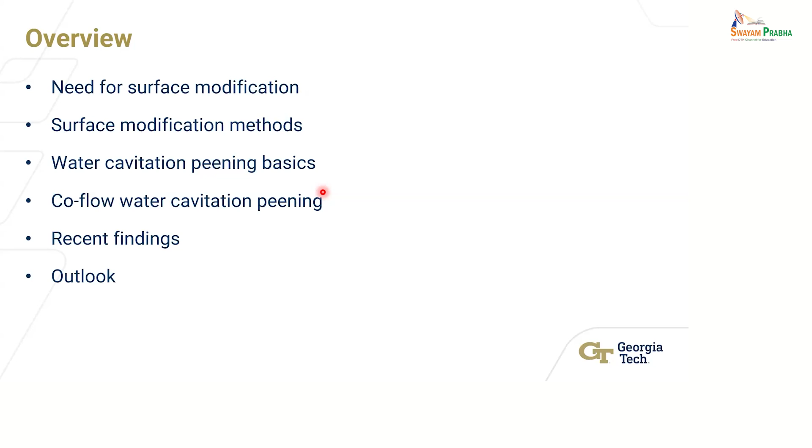You don't want any relative motion, but it can happen, so there's a failure - these blades can fail. That's a catastrophic failure, by the way. If you're flying a plane and that happens, that's a bad thing. It should never happen - rarely it happens, but it does occasionally. That's a turbine blade example where it failed because the properties it was designed and manufactured for were either inadequate, or the environment or operating conditions exceeded what you designed and produced it for.

Fatigue failure is common. Any kind of surface subjected to cyclic loading - whether mechanical, thermal, or some other type of cyclic loading - eventually fails. It's designed to withstand a certain number of cycles before it fails. Hopefully that number of cycles is well beyond the life of that component - that's how you want to design them.

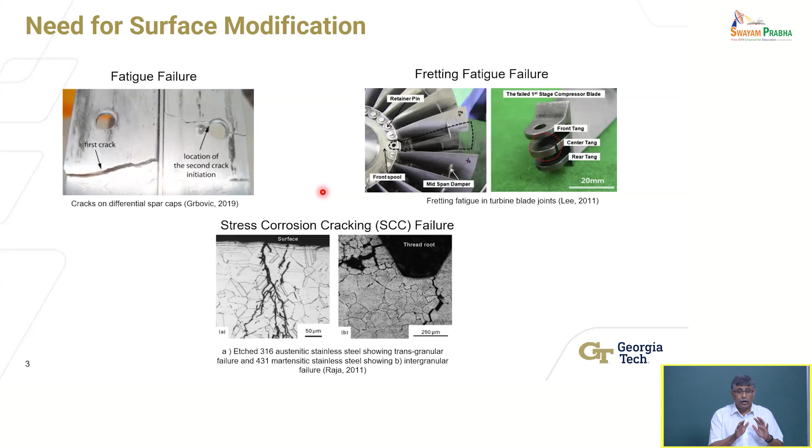So these are the reasons why we need to somehow modify the surface to avoid these types of failures. That's the motivation for surface modification.

Now, there are many ways to modify surfaces. Professor Samuel did a great job telling you about many different manufacturing processes. You produce the component, but usually these types of products that require surface engineering need more than just the manufacturing process - you produce it, then may have to subject it to some other steps, such as the surface modification process I'm going to talk about.

So there are many types of surface engineering processes. Typically, the goal is to achieve a certain type of surface quality, both in terms of topography, geometry, microgeometry, as well as near-surface properties - mechanical properties, tribological properties such as friction, wear, lubrication, whatever phenomenon is relevant to that application - and subsurface mechanical properties. Some fatigue failures happen because a crack initiates just below the surface and propagates, or a ball bearing fails and spallation occurs, things of that nature.

So there are many ways to actually modify surfaces. There are ways to do surface engineering where you don't alter the chemistry - and this is what we will focus on, where we're trying not to alter the chemistry. But there are also processes where you will alter the chemistry, and sometimes that's desirable.

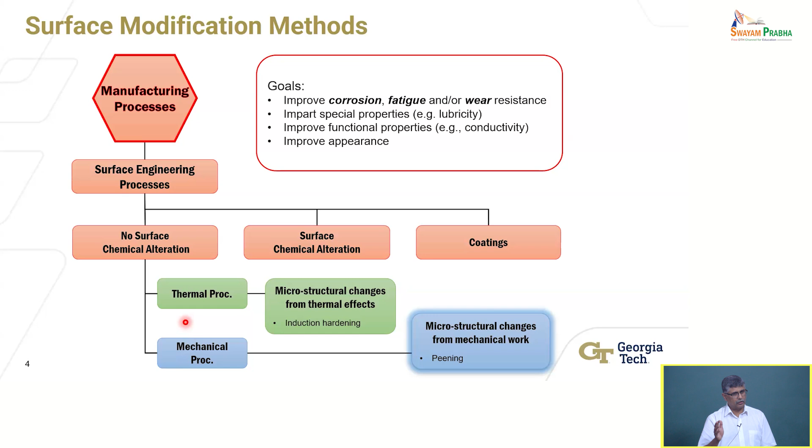The simplest way to think of peening - there are many types of peening technologies, but the simplest example is shot blasting. How many of you understand what I mean by shot blasting? You basically subject a surface to mechanical shots, which could be pellets - steel pellets, ceramic pellets, whatever the case may be - hard material impacting the surface and producing localized, permanent deformation.

Yes? How do you basically identify whether the process will be thermal or mechanical? How do you identify whether the process to be carried out will have thermal effects or not?

That depends on many factors. For example, sometimes you can do both, and there may be non-technical reasons for you to pick one or the other. For example, laser shock peening - Professor Samuel mentioned it - you can use lasers to achieve the same end effect, to modify the surface, but it has its advantages and limitations. Sometimes the limitations for your particular application may be such that you can't use it. If you can use it, that's a thermal process for you. Whereas in your case, you may either not have a laser system that can do it, or it might be too expensive - there are non-technical reasons that can drive it. Sometimes there are technical reasons, because that material cannot be subjected to the kind of thermal temperatures that might be generated, as it will damage the material below the surface. So it's a good question - there is not one simple answer to it.

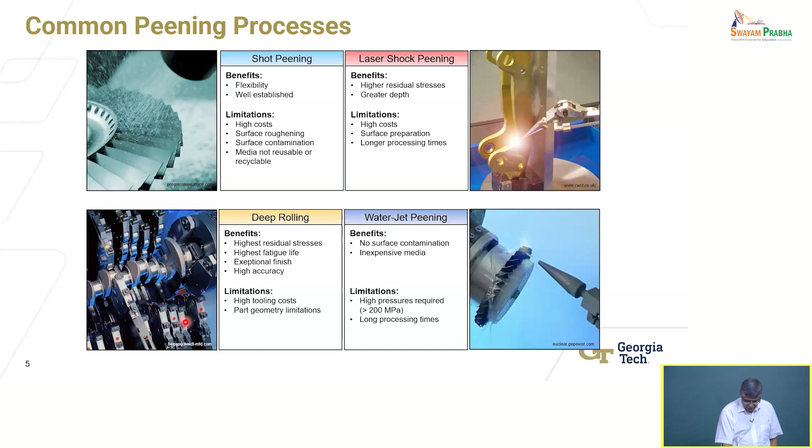So that's the motivation for us to look at an alternate technique called water cavitation peening. So what is water cavitation peening? I won't go through everything on this slide - the point I'm making is to justify why we should even look at this process. Why do we need a new process? There are at least four I've talked about.

They exist because in general it's not just a matter of residual stresses. Residual stresses are key to extending fatigue life, but other factors matter too. Surface finish - fatigue life is determined not just by compressive stresses, it's also affected by surface finish. If you have a rough surface, those roughness peaks can act as stress concentration points and lead to failure. So you need to balance all of these things.

Also, if the surface has been cold worked - how many folks understand cold working? Undergraduates, I want to make sure - I know graduate students understand it. Do you understand cold working, hot working, warm working? You're working the metal, deforming it at different temperatures. Cold working would be under room temperature - plastically working the metal is what we're talking about.

So if the metal's already been cold worked, what have you done to the metal? What does it mean to say I have cold worked the metal? It's been deformed - but what does deformation do to the material? No thermal stress is acting. What I'm trying to ask is, why did they change? What did you do? By deformation, what do you mean? Dimensions change.

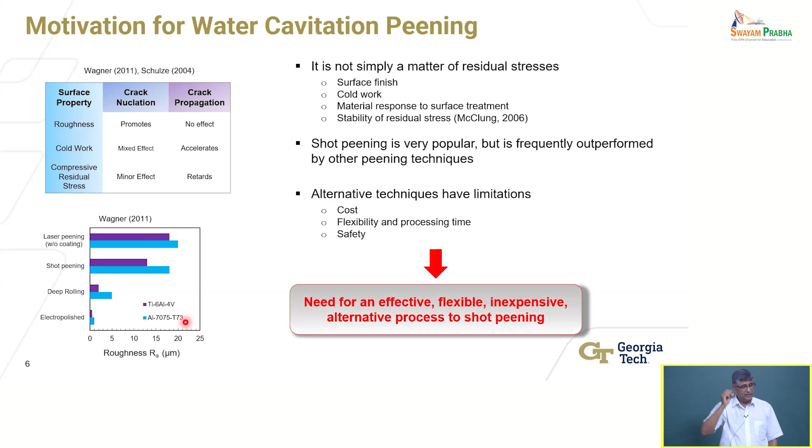So there are reasons to look at alternate methods. But practically speaking, cost, flexibility, processing time, safety - these are all other factors that in practice people want. I mentioned shot peening is used in the aerospace industry, but people throw the shot away to a landfill, and that's not a good thing. That could be a reason to focus on some other process. So we need an effective, flexible, inexpensive alternate process to shot peening. That's what motivated us to look at it - we had a sponsor, an aerospace company, that actually came to us and we worked with them.

Now I'll explain the very high level understanding again, and for those who have a deeper level of understanding, can ask me questions and I'll try to answer. But I'll try to keep it at a level where I don't lose the interest of a lot of the undergraduate students here as well.

So what is the principle of cavitation? How many people here understand what cavitation is, or at least know what it is? Basically cavitation is due to some stresses making a cavity in the surfaces. No, that's not the cavitation I'm talking about.

Cavitation is basically a phenomenon that occurs in fluids - fluids will typically cavitate, although gases can cavitate too. What does cavitation mean? It's the appearance of vapor cavities - think of bubbles, air bubbles forming in a column of water. Say I have water with no air bubbles to begin with, but depending on how I deliver the water, I might generate vapor bubbles. These vapor bubbles form inside an initially homogeneous liquid medium, such as water or any other medium, due to a local reduction of pressure - the pressure in the flow drops and a vapor bubble forms. Think of not just one bubble, but hundreds and thousands of bubbles forming - that's the phenomenon of cavitation.

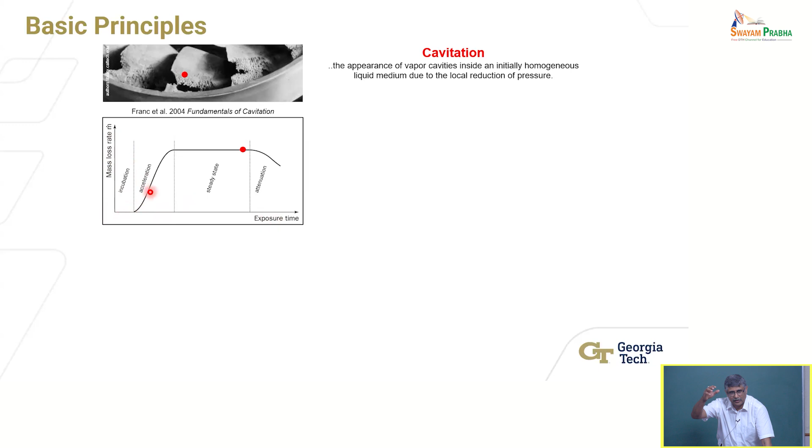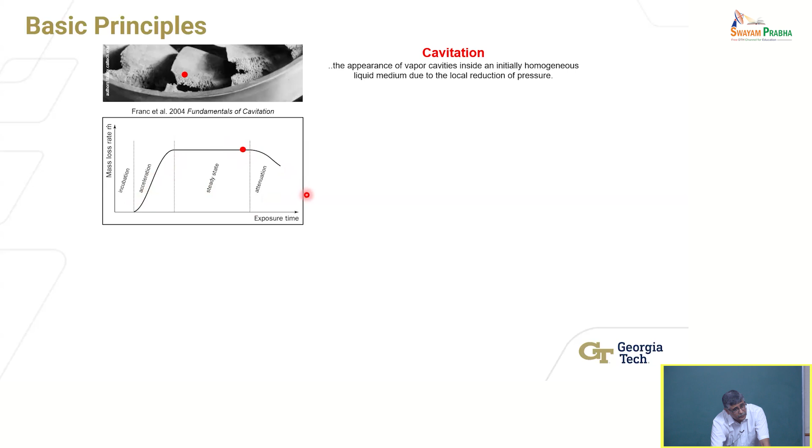Initially, the surface has some incubation time. It takes some finite amount of time for these bubbles to produce enough strain in the material to cause it to deform plastically, and once you strain it past the elastic limit, the fracture strain, it'll fail and start eroding. So it takes some time. There's an acceleration period, then steady state, and eventually it'll attenuate. So how do we take advantage of this?

This is the basic principle. So how do I use it to generate residual stresses? Instead of using mechanical shocks, I want to use these bubbles.

If you look at this plot, mass loss versus time, initially what will happen is the shock waves will deform the surface locally, past the elastic limit, straining it, and once you remove the load, you'll have some residual stress. So residual stresses will rapidly build up.

If you continue to expose the same region to these collapsing bubbles, you try to strain it more and more up to a limit, and eventually you start causing it to fail. That takes longer. So if my goal is to erode and remove material, I'll expose it for a very long time, or some finite time depending on the material. But if I simply want to generate residual stresses, I'll expose it for a much shorter time period, and the stresses will saturate, then I stop. This time is about a 5th to a 20th of the time it takes to erode, so it's a very short amount of time.

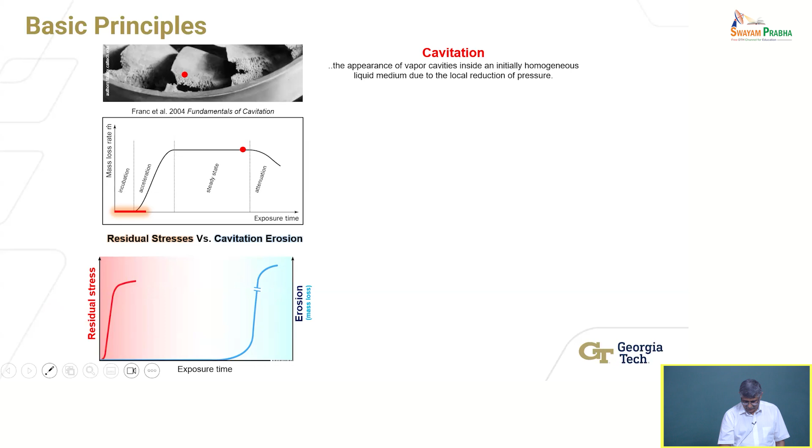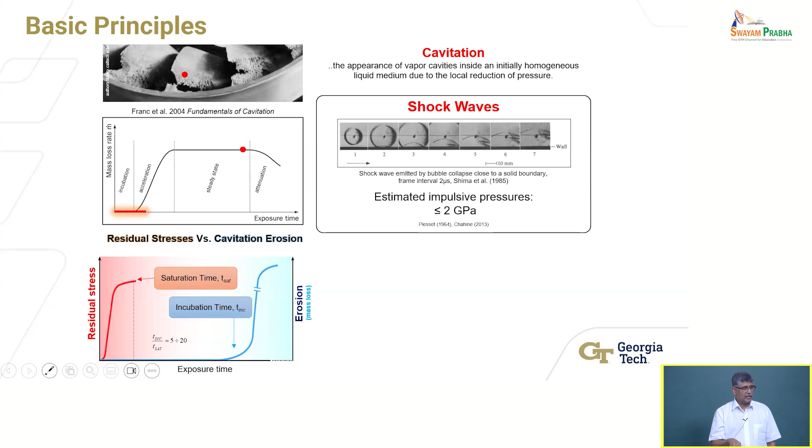As I already said, you can generate very high impulse pressures. Each bubble collapse event can generate on the order of gigapascals in localized pressure, which is sufficient to deform the material. You also generate what are called reentrant jets, micro jets formed as the bubbles collapse. Think of it as water coming in, and between the bubbles there's a very small gap that reduces as the bubble shrinks during collapse. This speeds up the water and produces very high speed jets, on the order of 500 meters per second, extremely high speeds.

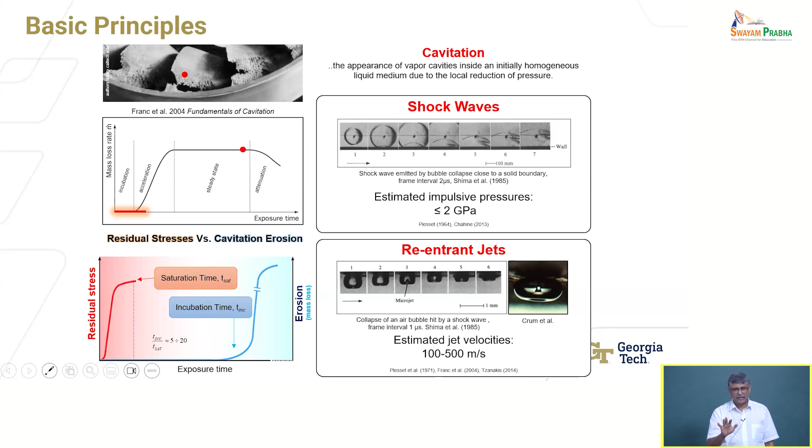The combination of these two things, high impulse pressures and micro jets, can be taken advantage of to generate residual stresses using water. That's the idea behind water cavitation peening, the basic concept. As long as you understand that, nothing else matters, everything else I say is extra stuff, even if you don't follow it, it's fine.

Now, how do you do this in practice?

So this is a process that's actually used. It's part of the standards for treating nuclear reactors in Japan. They use a process like this called water cavitation peening because a nuclear reactor is already in submerged condition, liquid is there. So they can do it with liquid present without having to evacuate and stop the reactor. That's one advantage. But it can be used for aerospace and other applications too. A lot of the work was done in Japan initially.

So what is happening? The easiest way to generate this cavitation phenomenon, you can actually generate even with a pipe. If you have a garden hose and you constrict the water flow to speed up the velocity of fluid high enough, and you shoot it at some dirt, you'll clean it. That may be just water hammer impact, but if you generate enough turbulence, you'll actually produce cavitation there too. So there are very simple ways of generating it if you want to.

The simplest way here for industrial use, obviously you are not going to take a garden hose and try to do that in a manufacturing environment. So the idea would be to take a nozzle, design it with some geometry, and submerge it in some tank of water. So this is a stationary column of water. Here's a nozzle submerged in a tank of water.

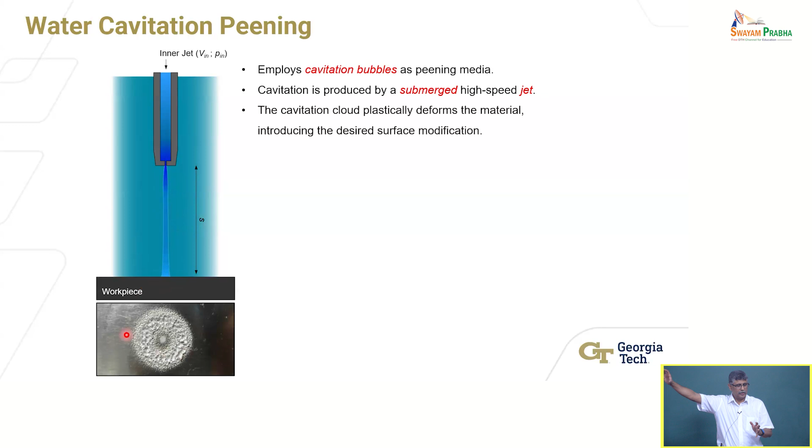Now this jet is moving down, let's say at the surface, and if you can design this process such that this cloud of lots of bubbles - I'll show you some videos - comes and collapses at the surface, and if you expose it for a sufficient period of time (remember we talked about saturation and how long it takes to erode), if you expose it long enough, you will cause erosion like this. You'll have pits forming in the metal. That picture is an example of a jet like this removing material. That's the principle. It's called submerged cavitation jet peening. This is one way to generate it.

The other process we'll talk about is a variation of this. Now the disadvantage of this is that if I want to do this on a large aircraft structure, I need to submerge that structure in a large tank of water. That's not practical - I need to build such a big system to do it. It's expensive, not easy to do. But instead, if I were to take a high-speed jet and put it inside a low-speed jet, like a coaxial tube - two tubes coaxially located, such that you have a low-speed jet and a high-speed jet - I can put this coaxial tube at the end effector of a robot arm or on the end of a machine tool and move it around anywhere. I don't need to submerge anything. That's the other variation we looked at.

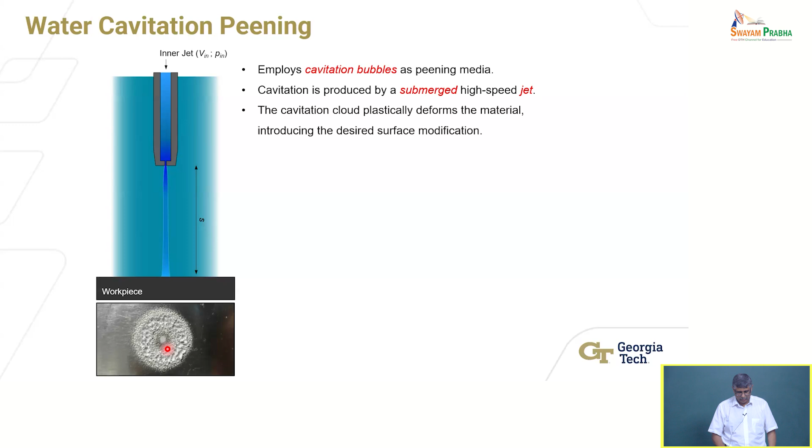So anyway, this is the cloud that I'm talking about. Here's an example from Professor Soyama and his group in Japan, which shows this submerged process generating this cavitating cloud. This is the cloud being generated, and it's collapsing in this region, causing this peening effect or erosion. If you expose it for too long, it'll erode. If you expose it for a shorter period of time, just enough to saturate the stresses in the material, you'll produce residual stresses - same idea as shot peening. Sometimes people call this shot-less peening, since there's no mechanical shot. But anyway, the same idea.

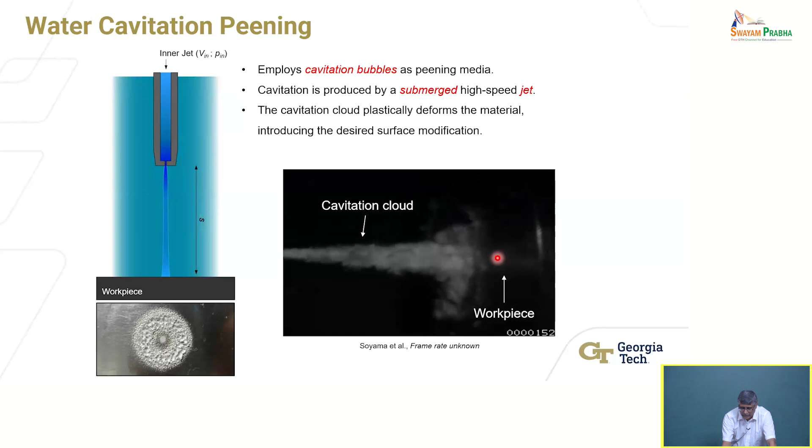Is cavitation present normally in the fluid, or are we creating it? You're creating it by injecting a high-speed jet into a stationary column of water. So like you said, propellers due to cavitation. Correct. Correct. So does it mean that the cavitation is present in the water? It's not.

It's created by the rotating turbine that's generating turbulence. That's what's happening. If the ship is stationary and the engine is not running, it won't cavitate. It might corrode, but that's different.

Sir, by what do you estimate that the process is done, that the target is achieved? How do you determine that you concentrate that material for this many seconds or minutes? How do you estimate the time? That's not simple. You have to understand enough about the process.

You have to understand the material, and the response of the material to the process. What is the process doing in the first place? How do these bubbles collapse onto the material? How much does it deform, and how long does it take for it to strain? All of these things have to be understood before you can say I need to expose each point on the surface for X number of seconds.

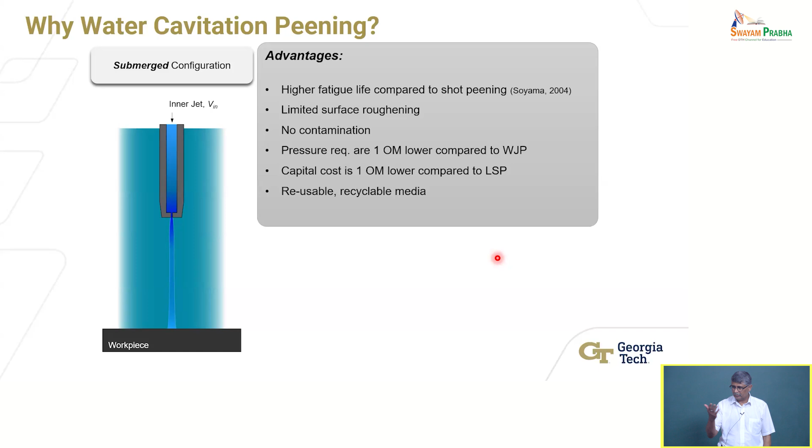The media is reusable and recyclable—water can be recycled, etc. Is this method effective enough for composite materials, or is it restricted to metals? Metallic materials only.

I'll show an example at the end where, for peening, you don't peen composite materials. Composite materials can't be treated this way because they don't behave the same way. They basically have a polymer matrix with some reinforcement material that is inorganic or organic, so they won't behave the same way. You cannot produce the same effects in composite materials, at least not polymer composite materials. Metal matrix composites are a different issue.

Are there any other similar methods that could be used as alternatives for composite materials? Well, for composite materials under fatigue loading, you design the composite material to withstand fatigue loading rather than doing post-processing or surface engineering to achieve that result.

Composite materials are lightweight, they can be strong and lightweight. That's what lightweighting is driving their use, whether it's in aircraft structures, skin of the aircraft, or in high-end electric vehicles and so on, body of the structure. So none of these processes, peening is not something people do for good reason, because these materials don't respond the same way metals do.

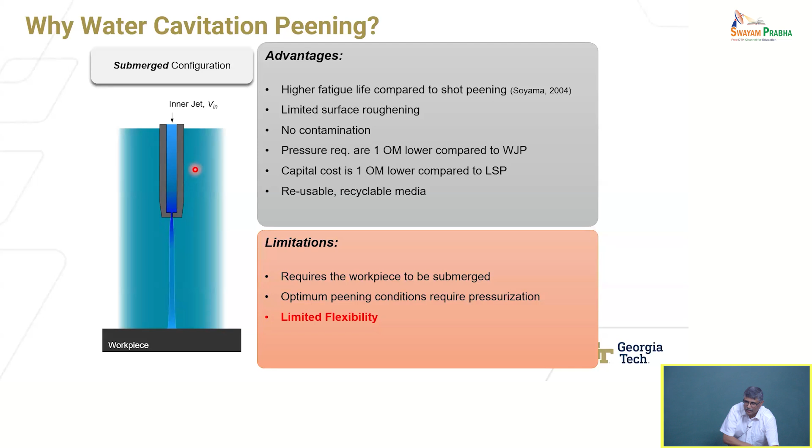It's harder to do. So a co-flow system, which is the same idea, but you have a high-speed jet injecting water into a column, but it's a moving column, not a stationary column of water surrounding the high-speed jet. And that low-speed column of water is generated through this coaxial pipe around it.

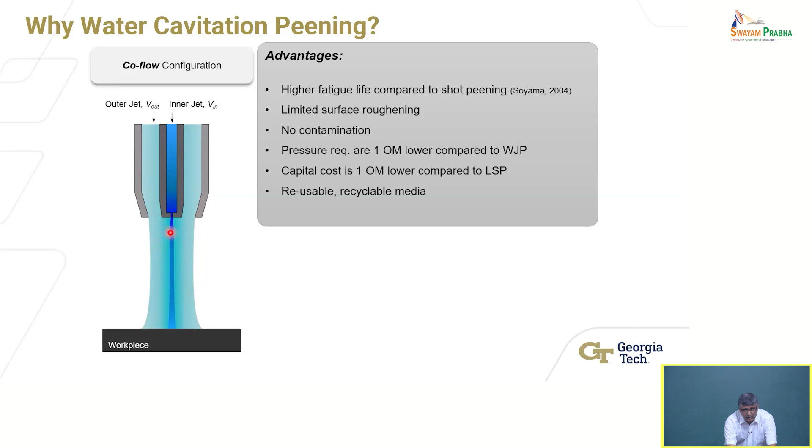So you still have the same principle. This high-speed jet interacts with the low-speed jet, okay, generates shear or turbulence, generates cavitation, and moves this, right? Same idea. The thing is, this process people have not investigated a lot.

So about 10, more than 10, 12 years ago, around 2010 or so, we said, okay, this sounds interesting. This is a practically relevant process. I can put this on the end effector of a robot arm or a gantry and move this around. So from a practical implementation standpoint, it's easier. Or I can do it on a machine tool where already I have an actuation system, right?

XYZ motion is there. You also have coolant in a machine tool, which is an oil-based emulsion, water and oil, right? And I can machine the part, and then I need to peen one region of the part. I can simply change from a cutting tool in a CNC machine to a nozzle and use the fluid to do it. That is our idea.

That's where we started. Industry did not like that idea because they say, well, I buy a machine tool to cut metal, not to peen. So that is their practical reason. But to me, as a researcher and a scientist, hey, that's practical. I can do it on the same platform, both produce the part and peen it, right? So, but anyway, that's where we started.

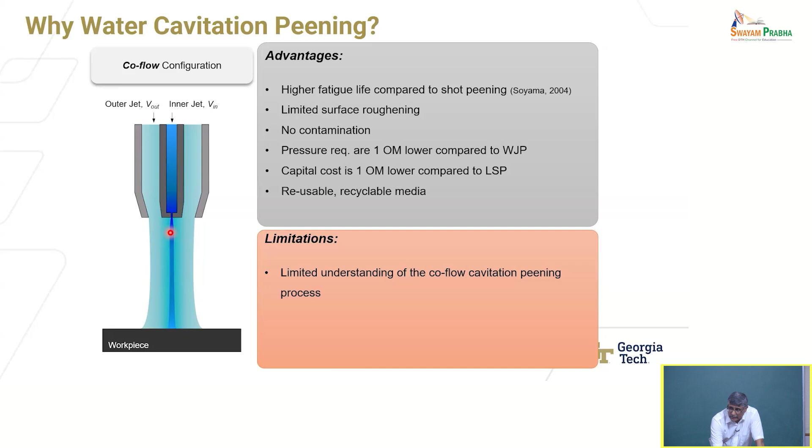So we can do this much more easily, and that is our reason, but the scientific understanding was not as deep available in the literature. The Japanese had done some work. So we started looking at this, and here's a video that shows you the co-flow cavitation phenomenon.

It's a high-speed video of the cloud forming and dissipating. You see that dark region in the center, and you see the low velocity fluid around it, the column. That's the coaxial flow, low speed jet. High speed jet is that center one that injects the water and generates this cavitation cloud.

There are lots and lots of air bubbles. You cannot see how many. We don't know, that's the unknown part. It requires very sophisticated ways of actually trying to see what's inside. Those go beyond even what we can do. I mean, there are people in fluid mechanics who will do some sort of imaging techniques to try and understand it, but it's still a research issue.

But nevertheless, I can generate this. You can see this pulsating cloud formation and dissipation, formation and dissipation. And you see some oscillation as well, right?

And so if I place the part, the surface that I want to peen, at the right distance, where I have the strongest cloud, let's say the largest cloud, which hopefully has most of the bubbles, okay, and make it collapse, then I should be able to alter the surface, right? Modify the surface. That's the idea.

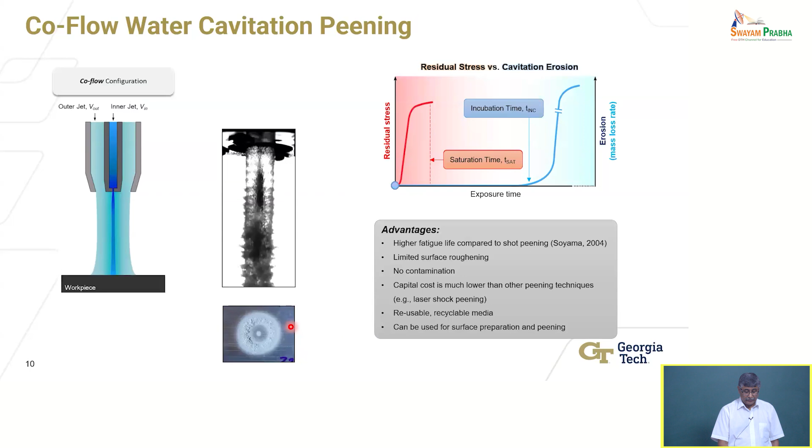You will have to vary the pressure at the pump, basically. Now there are ways of varying the pressure by designing the nozzle as well. So if you have a fixed pump and you want to intensify the cavitation, make it stronger, so I can peen more difficult to deform metals, titanium alloys, some other super alloys, then the bubble collapse events have to generate much stronger impulse pressures. You can do that by designing nozzles.

So this is where the intellectual property lies. The creativity is in how you design the nozzle. That's one way of changing the pressure characteristics. So, yeah, that would be the way.

So when we compare this co-flow configuration, is the advantage only the time variation? No, I think it's the flexibility of the process relative to the submerged case, where I need to have a tank. Here I don't need a tank, so it's more flexible. I can move it around anywhere I want. We even built a handheld system, and robot end effectors, you can implement it however you want in practice.

So those are practical advantages, but in theory, it's possible to generate even stronger cavitation. People have shown work that stronger cavitation than even submerged is possible. But based on my own experience, I believe that submerged is the easier one to implement. All it requires is one high-speed jet in a tank of water. If I want to do basic studies, I can do that. This is what Soyama and others in Japan did much of the work on, submerged cavitation peening.

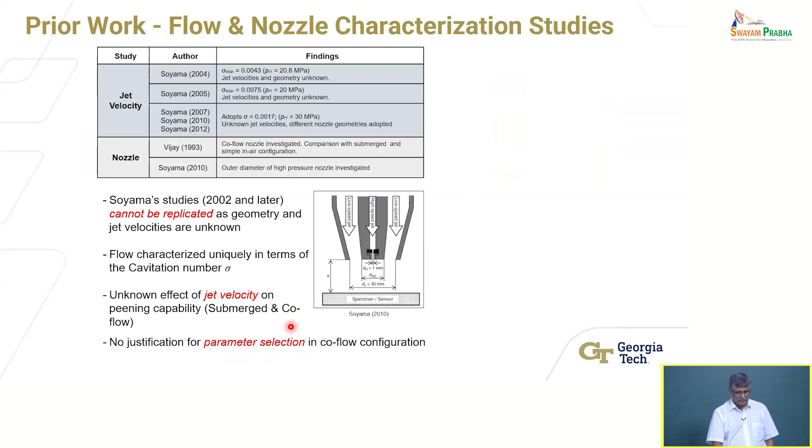There's work in the literature, a lot of work has been done in submerged cavitation peening, so I won't go into all of those details. In the interest of time, again, like I said, nozzle design is key.

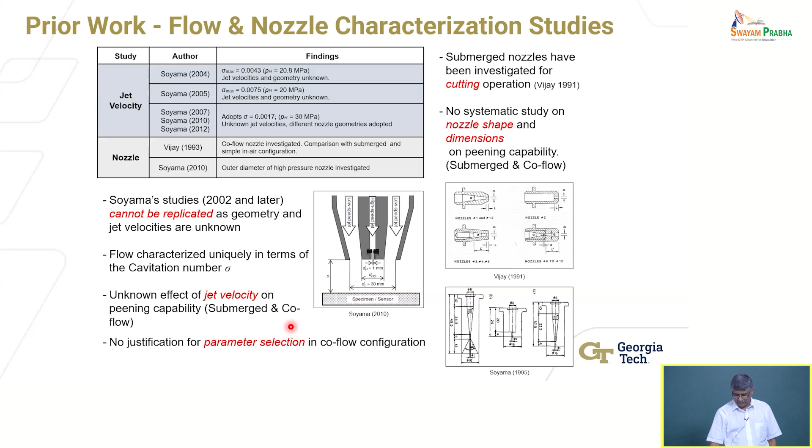There hasn't been a systematic study, or there have been some for sure, but systematic study for the co-flow case at least was lacking. The Japanese have done work on nozzle shape and dimensions and how that affects the peening characteristics, and you can find some literature, but systematic study was required. Or they don't give you all the details, so you don't know the geometry, what pressures were generated, what velocities were given, etc. So that motivated something, and then there's more work that has been done. You see some of the names, so I won't go into that.

This is less important, but this sigma is how you characterize cavitation intensity. It's called the cavitation number. It's the pressure differential - the pressure at some point in the flow, minus the vapor pressure at a given temperature, since vapor pressure will change with temperature, divided by the kinetic energy of the flow. Half rho times u infinity squared is the velocity at the nozzle exit, the kinetic energy of the flow.

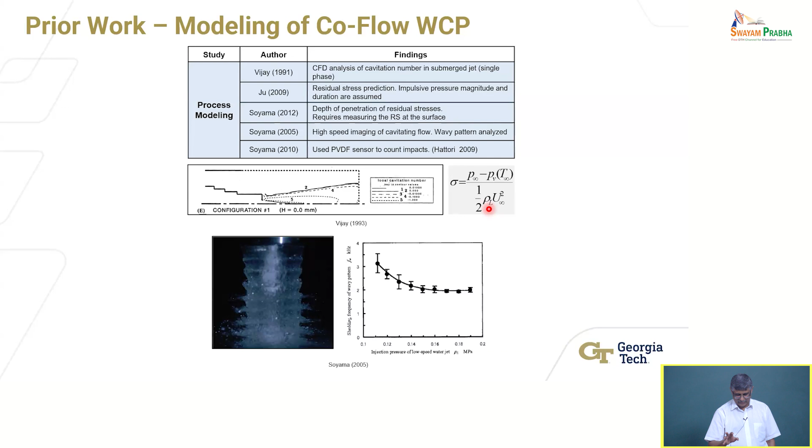So the pressure differential over the kinetic energy gives you a dimensionless number that tells you how strong the cavitation is, how likely it is that the flow will cavitate. Sigma, the lower the value, the more likely cavitation will occur. That is the basic understanding. So you want to drive down the sigma value, and people use that as a metric.

So these are some of the limitations - the effect of nozzle dimensions, can you scale this process, what is the effect of jet velocity, all of those things. When we started looking into this process, these were not known, so that motivated us. Our goal was, can we eventually model this process, design the nozzles, engineer the nozzle shape, etc., to generate cavitation intensity in a predictable manner so we can optimize the process and implement it. That's our goal.

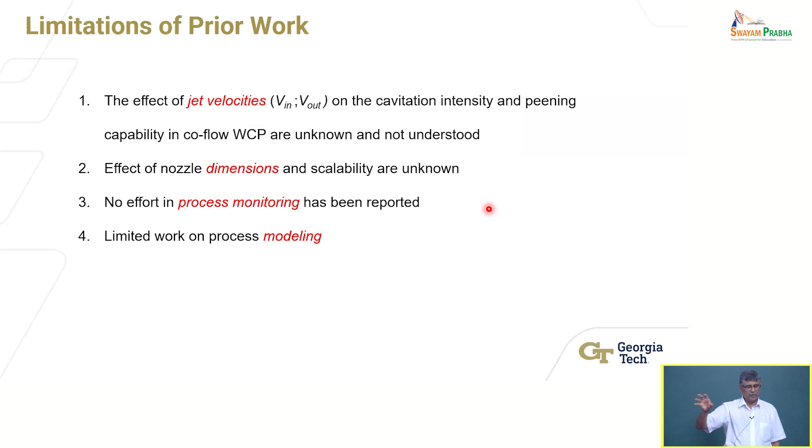So we built a system. Now you can't buy these systems, right? You can't buy these machines, at least to the best of my knowledge. Maybe there's somebody who will make it for you if you give them enough money and tell them how to design it. So we had to go design it ourselves.

It's on a gantry system, so you can program it to move to different points and different speeds and peen a surface. In practice, you'd be doing it over a surface, not just one place, one location. Ideally not.

It gives you some numbers, you know, 34 megapascals, which is about 5,000 psi, that you can generate. It doesn't require a very expensive pump to do this. For the low pressure pump, it's even less requirements, so easy to do.

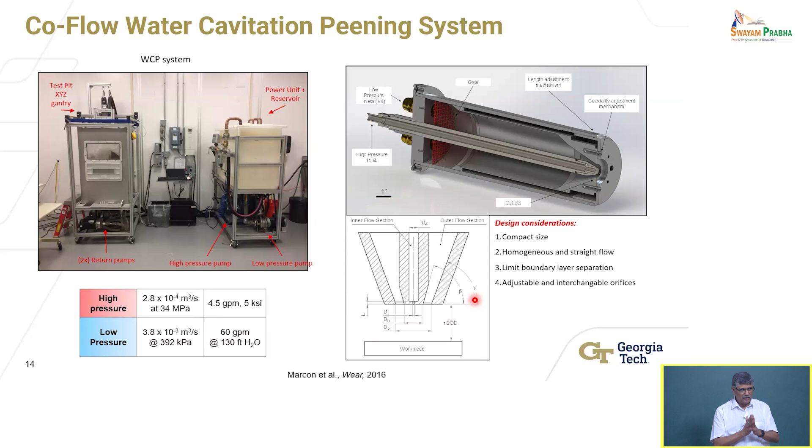But the problem with doing this through modeling and simulation, as people have tried, is you need computational fluid dynamics type simulations to simulate turbulent flow, which is not very easy, even according to the fluid mechanicians. So for cavitation simulations, while you have CFD tools today that give you some capability, you have to be a real expert to know whether what it's doing is correct. That's the danger - you can use software blindly, which is very dangerous. You have to be able to analyze and understand what it's doing. Just because it's solving the Navier-Stokes equations some way, there are many ways to solve it, doesn't mean it's doing everything correctly. So this is what we realized.

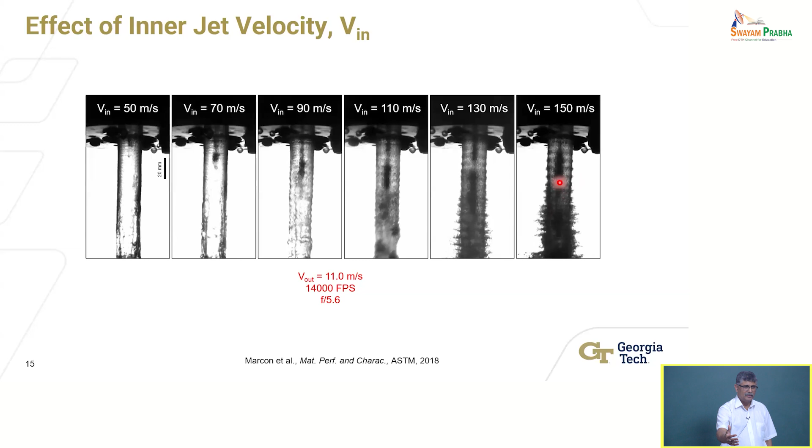What is happening is that the inner jet is accelerating the outer jet. Because the inner jet is moving at 150 meters per second and the outer jet is moving at 11 meters per second, it's accelerating it, and eventually it destroys the flow characteristics. So yes, I can generate very thick clouds of cavitation, but then the distance to which that cavitation cloud can be carried by the flow is limited. That's what it means.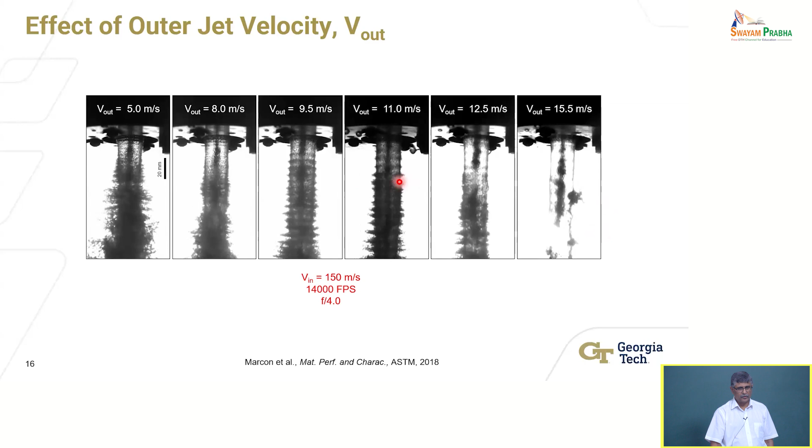What happens when I keep the inner jet velocity fixed at 150, because 150 gave me the largest cloud, what looks visually to me like the strongest cloud, I vary the outer jet velocity. You can see that at very low velocities it's problematic - you completely destroy the flow and it essentially dissipates. It improves a bit, and then at about 11 is where we picked as the best case. After that, it's okay - you can do this as well at 15 if you'd like, but you generate the strongest cavitation clouds at a combination of 150 meters per second inside jet velocity and 11 meters per second for the outer flow. So that's our optimum, in our case, for our design.

So what happens now? You take these parameters in our system and run some tests to understand the scientific understanding I was trying to tell you about - that hey, I want to understand how strong is this jet, how much can it peen, how much residual stress can it generate.

Now the easy way - residual stress measurement is not easy. It can be done, the way we did it requires X-ray diffraction. It's expensive and time consuming. You can also use hole drilling type methods, but they're very difficult and take time. So I don't want to waste my time doing X-ray diffraction for all different combinations.

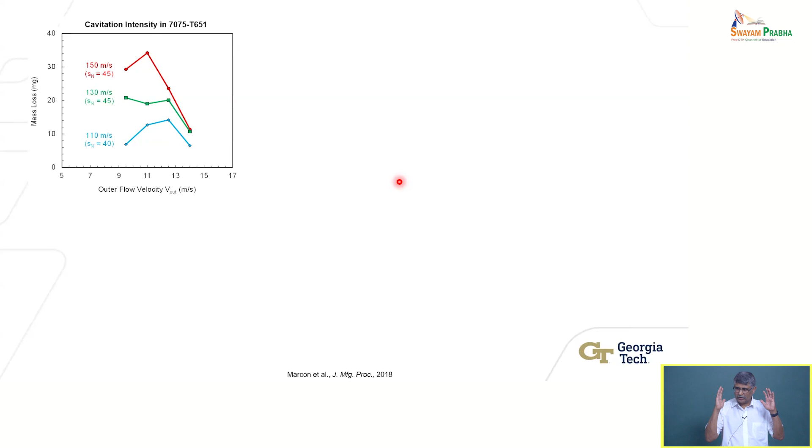So mass loss is a metric that is used. There are ASTM standards that tell you for cavitation you can use mass loss. Mass loss is how much, instead of peening, we are eroding. I expose the surface for an extended period of time, erode material, and see how much material I eroded. Obviously, if the cavitation is stronger, I should erode more - there should be more mass loss, intuitively. Which would mean that if I don't expose it for that long, I should be able to generate more residual stresses quicker. The same idea applies.

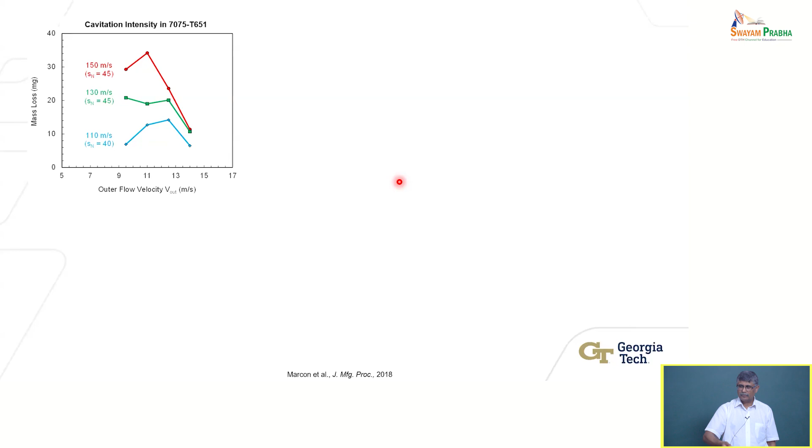So it's easy to measure mass loss. I can just take a scale, measure the starting mass, then expose it for a certain period of time and measure it again to see how much mass was lost. That tells me under these conditions what happened to the material.

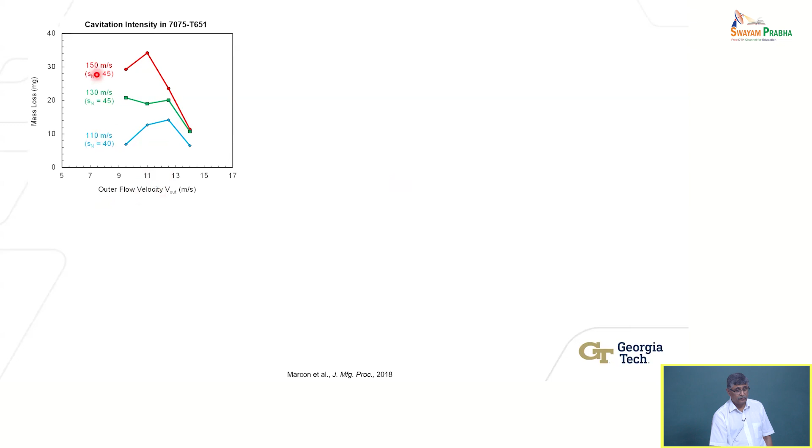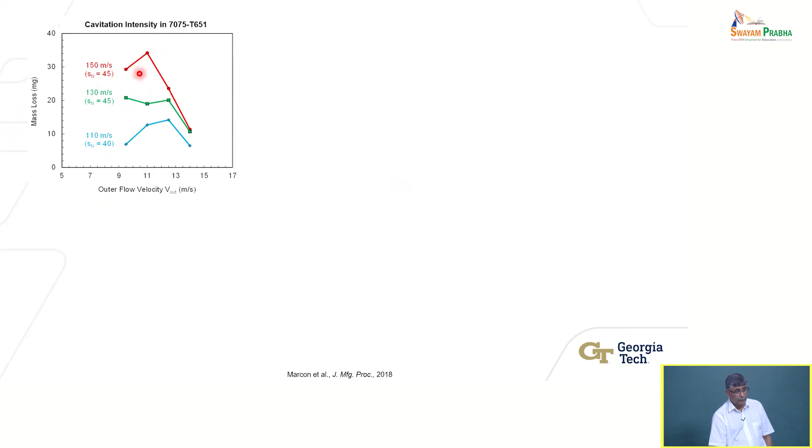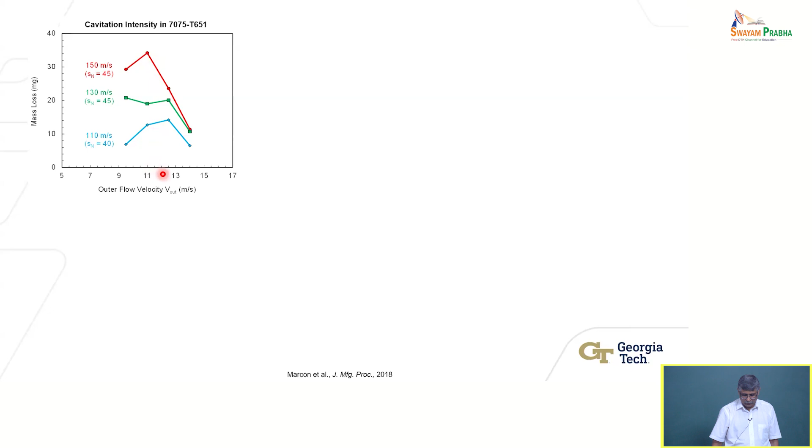So this is what we did as a function of the flow velocities - this is the outer flow velocity, and this is the inner flow velocity. This is the mass loss in milligrams of aerospace grade aluminum, 7000 series. You can see at 150 meters per second, clearly there's an optimum from these trends. Not every combination gives the best result, but generally 150 meters per second inner jet velocity and 11 meters per second outer jet velocity combination gives me the highest result with our system.

So now, how do I quickly test without having to do residual stress measurements using X-ray diffraction? How can I tell that under these conditions I will generate more or less residual stress? How do I evaluate that effectively?

One way to do that is using strip curvature measurements. If we take a strip of metal, say aluminum, that is stress-free to begin with - let's say it's annealed and stress-relieved, so you're starting with material with no inbuilt stresses or minimal inbuilt stresses - and then subject it to this process, but you don't erode, you only peen. You peen for a short duration to saturate the residual stress.

What will happen is, if there are sufficient residual stresses generated, they will lead to distortion. Because what are residual stresses? They are elastic stresses in the body that will equilibrate - they'll adjust, and to make sure the material doesn't break, it'll adjust its shape. You can show that from basic elasticity theory, that's what happens.

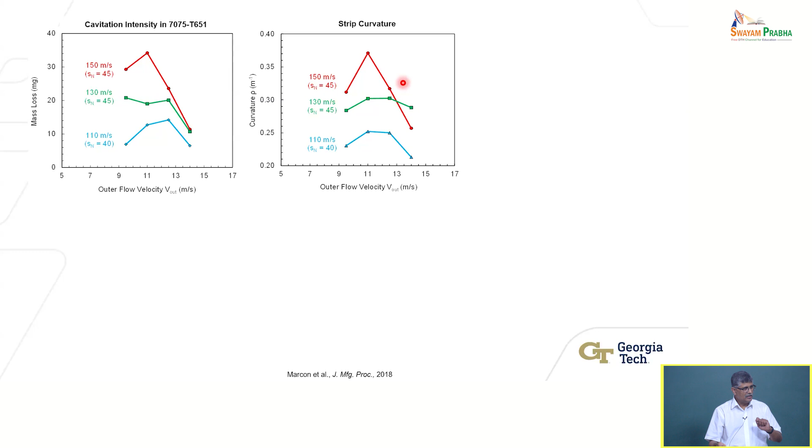So you measure the curvature. The greater the curvature means more residual stresses in the material. That's simple to do - I can measure the geometry or change in shape. This is what people do in practice as well. For those same conditions, the strip curvature is greatest at 150 meters per second inner jet velocity and 11 meters per second outer, suggesting that under those conditions I generate the highest amount of residual stress with our system. A more powerful system might do more, but it gives me an understanding of how these two knobs of velocity affect residual stress generation.

What happens to the roughness? Roughness is bad - too much roughness is bad. So while I generate more residual stresses, I'm also roughening the surface because these vapor bubbles are collapsing and deforming the material plastically. If you take a marble and throw it at a soft metal, you'll produce an indentation, but if you zoom in on that indentation, material will have plastically deformed on the sides - it'll produce a ridge, material flow.

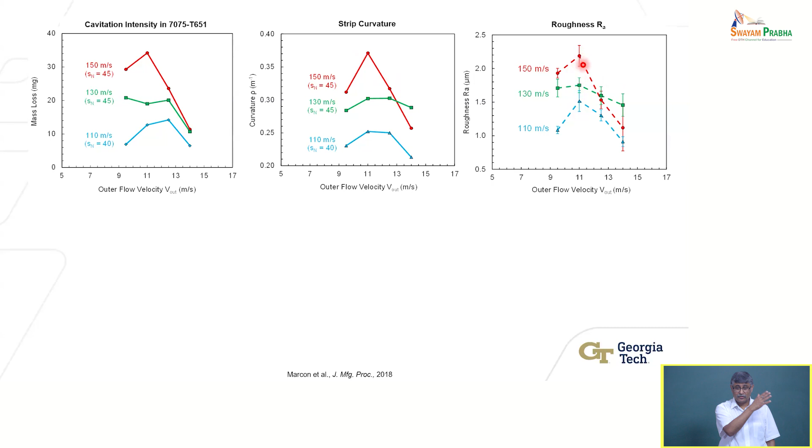The question is, how does it compare to other processes? Yes, you're producing some roughness. Hopefully it's less than the worst case or the best case for the other processes. Then I can justify this is a better process, right?

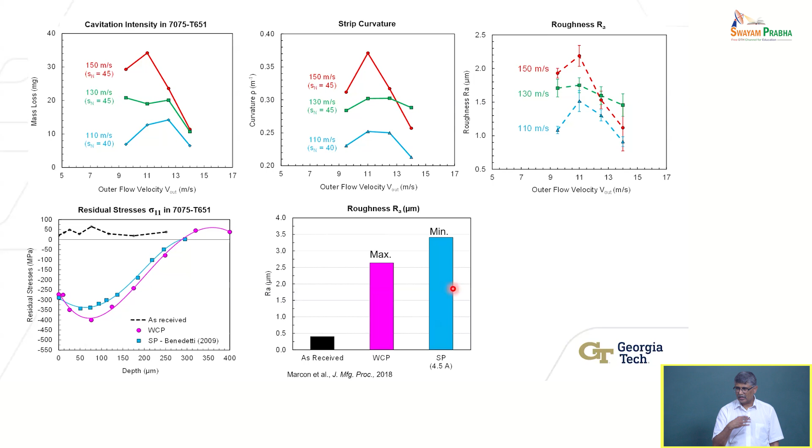So we did that, and you see here, this is roughness of the received sample, the aluminum sample. This is the maximum roughness we generated with our system, the worst case at 150 meters per second and 11 meters per second outer jet velocity. This is data from literature for the same material using shot peening, the traditional process, where the least roughness is worse than the worst case roughness in my case. So that suggests that while you do some roughening, it is not as bad as the other process. That's a promising result, at least.

This also shows you the residual stress distribution, these elastic stresses in the material measured through X-ray diffraction. You can see it's very deep, it's compressive. This pink colored curve shows you it's deeper. This is data from literature using shot peening. They are similar, and I'm not saying they're substantially different, but you can generate this using a process where you're using water and recyclable media and all of the other advantages we talked about. You're able to generate deep compressive stresses. Generally, this hook-shaped residual stress distribution is what is desirable for fatigue life enhancement.

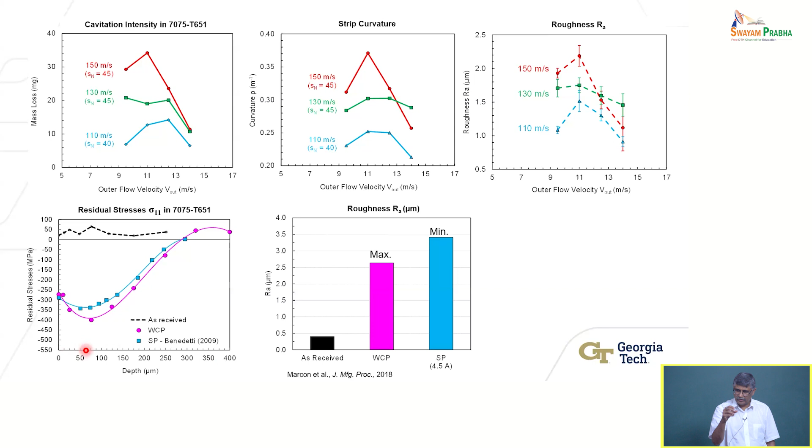So the x-axis represents the depth of the material, meaning it is going subsurface. It's going from 0, at the surface, down to about 400 microns below the surface. This is done through X-ray diffraction by electropolishing, removing layer by layer, few microns at a time, measuring it again, and these data points are the ones generated.

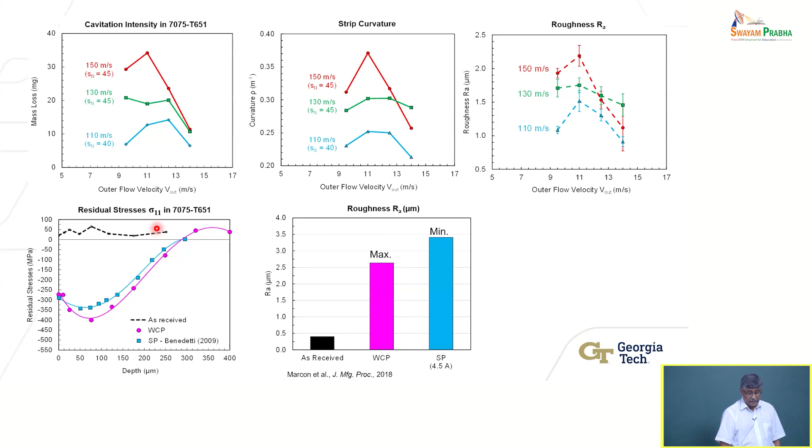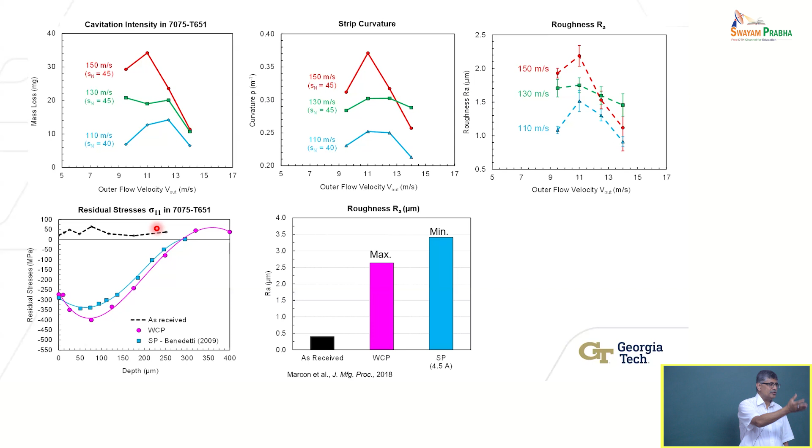So sigma 11, is that the deviatoric component of the stress? This is basically the stress component in the direction of, in this case, the surface that was peened, so this is the in-plane stress component. These are elastic stresses. Deviatoric stresses would essentially be what generated the plastic deformation. So does any process lead to plastic deformation? Correct, but what we are measuring is after you removed all loads, so what is remaining in the material is elastic stresses. Sigma 11 is the x-direction principal stress component.

One more question: while modeling the residual stress, we need a plasticity model. Yeah, you do need plastic deformation. So which plasticity model should we consider? That depends on the material, since the material is going under plastic deformation, and it might have some strain rate effects. So how can we measure the strain rate so we can choose the appropriate plasticity model?

People have actually looked at deformation rates in cavitation. These are very high strain rate processes. The localized bubble collapse events occur over very short durations, so the material is being strained over a very short time. These are high strain rate processes, probably on the order of 10 to the power 3 per second, maybe even higher.

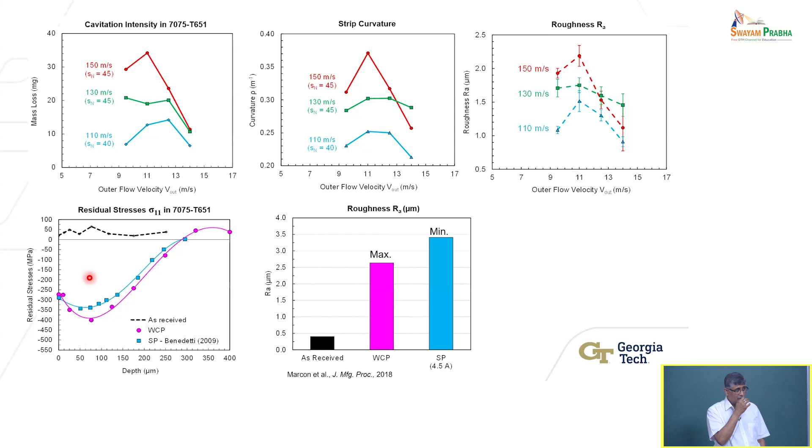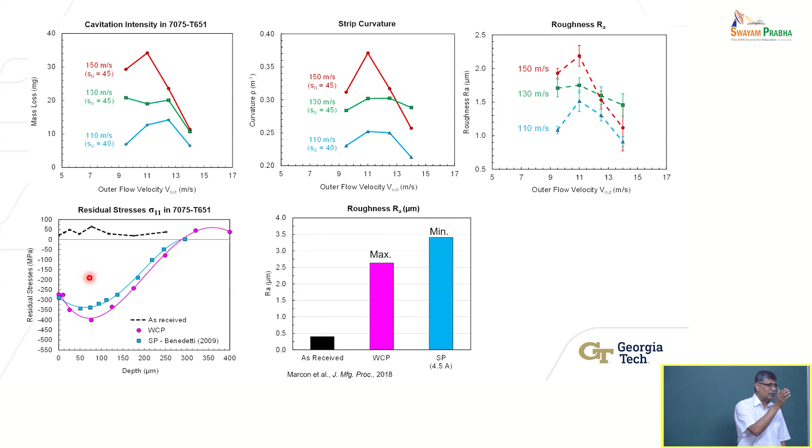If it's more than 10 to the power 5, we generally consider Johnson-Cook, but that's only one constitutive model, and it's purely empirical. You can use Zener-Hollomon, or many other types of constitutive laws, flow stress rules, material models. So yes, you can use Johnson-Cook, or Zener-Hollomon, or whatever, as long as we are following the correct model. You need to make sure that the constitutive response of the material follows, or fits, the model you use. That's all you need to ensure. There are many models, not just one.

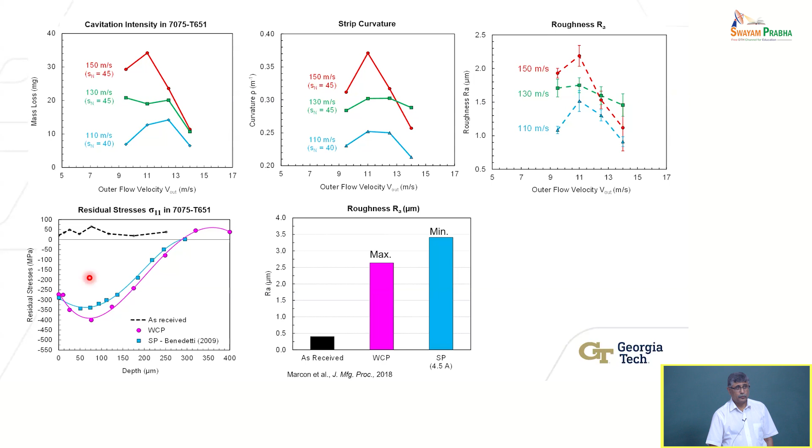Okay, we are actually technically out of time, and I have not even scratched the surface here. But in the interest of ending this class on time, I'm going to stop here, because my intent was to make sure I don't just throw 100 slides at you, which to me is useless if you don't understand half of it.

Let's stop here and see if there are any other questions. I'd rather stop here, but there are papers and other things I can point you to for a deeper understanding, including our own work. We tried different nozzle geometries and other things, like modifying the nozzle geometry to generate pressure fluctuations, as was asked. Those are details, and for those interested, I'll point you to the literature.

As long as everybody understood the rationale for the process, the basic principle, how you go about deciding why we should study this process - I think that's a more important takeaway than becoming an expert on cavitation peening. You cannot become an expert on something that was done over 15 years in just 1.5 hours. So I'll stop here.

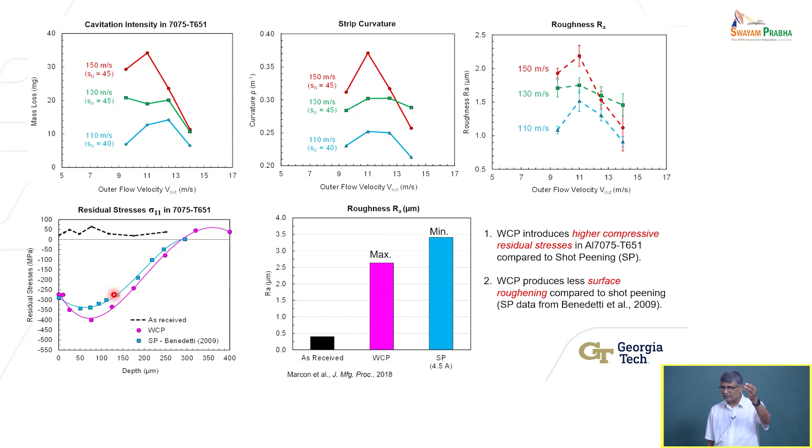Any other questions? He's asking, will there be any chips formed during the erosion process, and will that affect things? If you're eroding, material has to go somewhere - you will produce debris in the water, and that's not a good thing. This is probably strain-hardened material that can get entrained in the water and cause further erosion, or erode and damage your pump, since the water is being recycled. So you don't want erosion ideally, and you need filters. In our system, there's a filter that tries to filter out any particles generated before the water goes into the pump - those are all practical precautions you have to take.

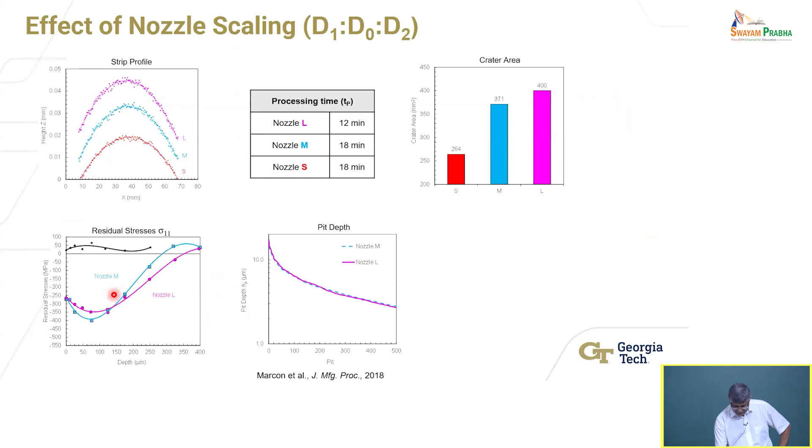Somebody asked me earlier - let me address this. I had more slides than I usually cover because I tend to go slow, but I'd rather do that since this is like a classroom, a course, not just covering everything while you understand nothing.

So what else can you do with this process? You can do paint stripping, because I can erode with it or peen with it. Usually when doing maintenance and overhaul of critical components like jet engines, you have to take an operating engine out of service, clean up, remove paint, strip paint from it, and peen it. Or it could be the aircraft structure where the wing meets the body - critically stressed joints - where you have to strip the paint, resurface it, recoat it, and maybe peen it again.

But now you have a process which can do all of that. You can use this process in erosion mode to erode the paint and strip it off, exposing the bare surface. Then you can peen that surface by turning different knobs on the same process, and then go ahead and paint it back. So that's another application of this process.

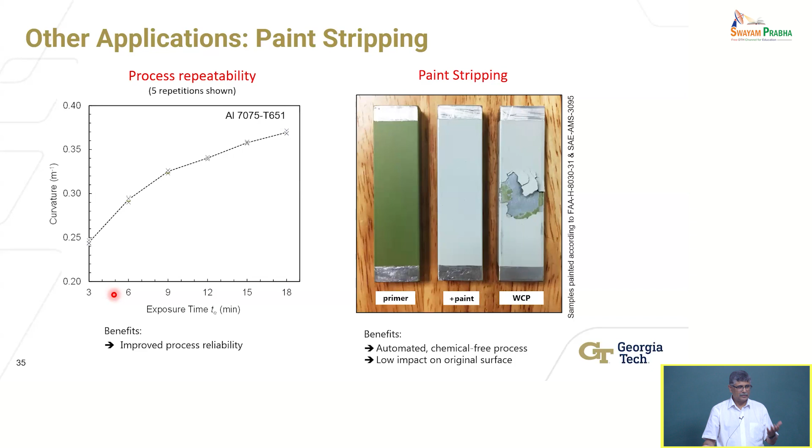We've also worked on, including recently, using this - it's water-based. Think about this for those of you interested in additive manufacturing, metal additive manufacturing, which is where much of the research is today. Additive manufacturing captures everybody's imagination - oh, I can make anything.

The reality is that the quality characteristics of additively manufactured parts are not where they need to be as built. You have to do post-processing. You have to improve the surface finish, maybe increase the density, maybe enhance the mechanical properties. All that requires subsequent processing.

Think about why people use additive or 3D printing. Because you can produce very complex shapes, hollow sections inside easily, lattice structures, very complex structures like internal manifolds. How can I finish the surface of internal surfaces? How can I not only improve the surface finish but also improve the mechanical strength of that inner surface? I can't even access it once I've built it.

Now, if I have fluid, I can force it through, and it can do both finishing and peening, then I can alter both. That's the idea. So we've taken that and done this at a desktop level by combining a process people actually use to finish metal additive parts, such as electrochemical machining or electrochemical polishing, because that's a fluid. But use peening, cavitation phenomena, combine the two to produce a hybrid process.